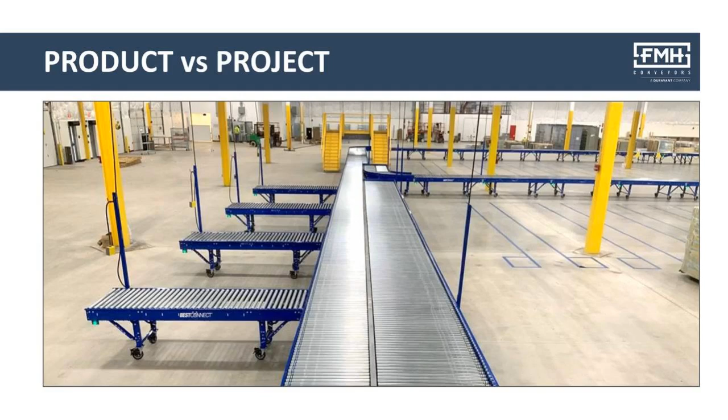So to be able to do that, I want to first talk about what the product portion of this is. The picture you see in front of you is a whole system utilizing various types of the BestConnect product that we have within the portfolio.

Looking at it, the benefits of the product are very, very key, because as you're looking to sell, to create value for your end user, it's important to talk about certain aspects of the product that work for them. Everything is on casters within this system.

It doesn't necessarily ship completely assembled. The bed sections ship on a pallet. The leg assemblies have to be assembled to that particular bed section, and obviously whatever height you need, you can have, but it's modular. Every section is essentially its own entity.

You can plug it in. Either end has COM cables, plugs, so that as you connect this system in a run, you end up daisy chaining them together to create your system and the componentry needed to keep the power and communication lines going. It's a very quick deployable system in terms of installation.

Most of these sections take 2 men, 30 minutes to build. Overall, once the system is built, it's very simple to deploy, rearrange, and create the space you need for multiple industries.

Hardware, very basic hardware to put these together. There's very simple connecting plates that connect the side frames to each individual section as well as the next one in line. And very basic accessories to create the overall system.

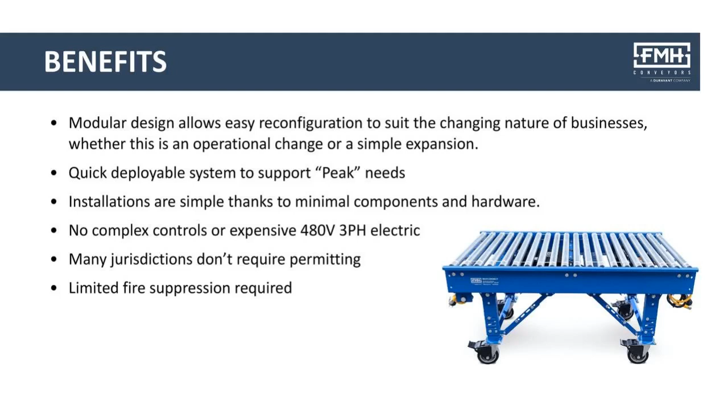Because you're not looking at 480 volt 3-phase electric, and you're not fixing it to the floor, which requires, a lot of times, fire suppression. We're able to get over the fact that you need fire suppression in most of these cases with limited areas. So it's a very flexible system.

Lots of the vertical markets I like to point out, because many of us, especially in these COVID times, are struggling with customer bases. There's certain people out there that are thriving.

E-commerce, no question, companies like Wayfair, Amazon, Chewy, all these companies that we as humans are ordering from to supply our typical day's needs, are using these systems. They're having to get new conveyor systems to augment their processes because of the uptick in their business.

And subsequently, parcel is a big industry. UPS, FedEx, their business is thriving, which then again relates to third-party logistics. So those are the 3 that I would say are major focuses, if you had to pick.

There's always other opportunities, it becomes more about how you can think of the application. But overall, those three vertical markets I really think are where we're going to thrive at this time.

Still on the product side, as I break down what is in the product, I'll go left to right of these pictures. That is a typical straight section you see in front of you. Each of them have illuminated off-on buttons, and these buttons are not something you depress.

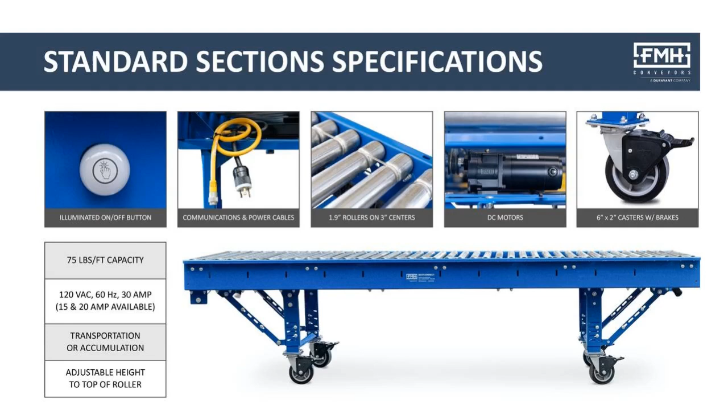All casters are 6x2 locking with brake. As you can see on the left-hand side of the page, there's a few more little tidbits: 75 pounds per foot capacity, adjustable height. We can do transportation or accumulation. But overall, this is the basic guts of each one of the sections.

Section types, we've really added to this in the last probably 18 months. Straight sections we can have in various lengths. Curves are utilizing a conical roller to keep orientation of the package.

We have lift gates, which are an up and downstream section that have wireless communication so that when you pull that lift gate up, it shuts down that system so it's not running. We've got skews and centralizers, which are utilized based upon how you have product orientation going in and out of curves, or having people adjusting using those boxes or actually using the conveyor.

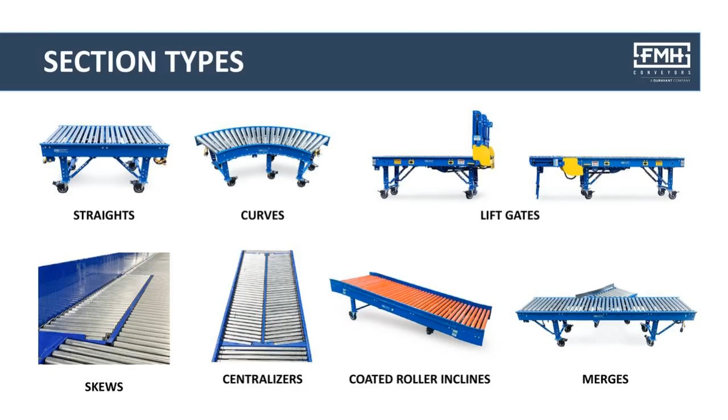Coated roller inclines, again, the coated roller just adds a little bit more friction for pulling that up. And then we have merges, which are a really neat thing that we've developed to be able to index 2 lanes into one. So again, these are all products going into a system.

The straight sections are the backbone to the system. You're going to have different lengths available: 36, 60, 90, 120. Really important for me to indicate that you can cut down on site. So if you're restrained and you need 84 inches, so long as you are cutting down on an axle center that works with it, it's very easy to do.

Standard widths, very basic, nominally at 24, 30, 36, and 48. And then if you employ accumulation into these units, you're going to have a zone approximately every 33 inches.

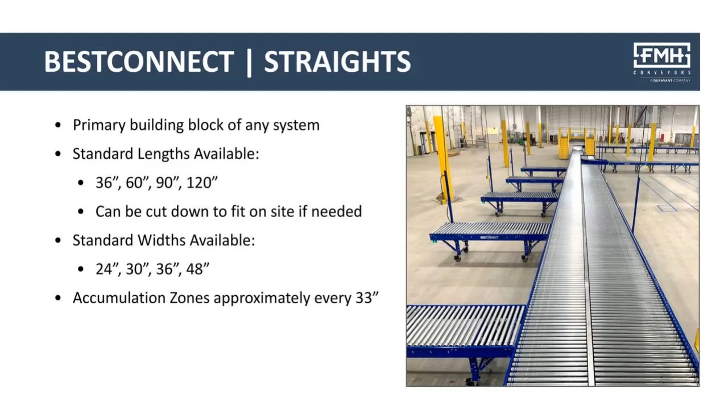Curves, again, very basic, conical rollers. You're going to use this to change direction. They're universal, either left hand or right hand. It's just about reversing the direction of the rollers.

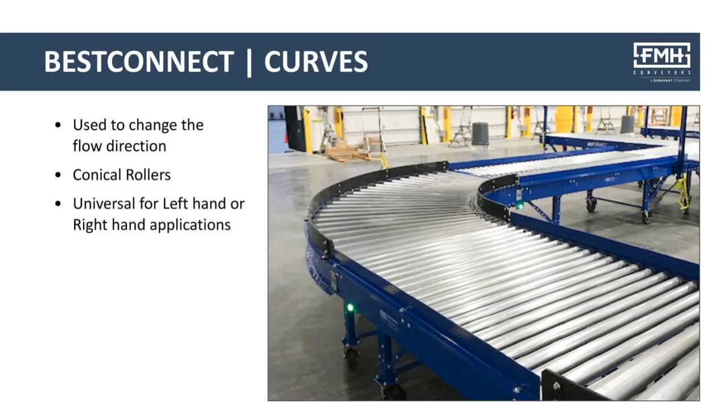And as you can see there, this shows some of those lighted buttons that I mentioned earlier, so that you can, again, visually, even through pictures, see the illumination showing that those sections are on.

Centralizers, this is something developed because when people are sorting packages, and this is true for any conveyor type, they're tossing boxes on, packages on, and they're haphazardly moving down that system. As it needs to sort to the human, to then subsort, say a pallet, a box, or a different area that the human has to handle, it's usually on one side or the other, so it's not necessarily ergonomically easy to gain access to.

So when you put these centralizers in, or a herringbone powered conveyor before or after a curve, it's going to center that coming out of that curve to where it's more ergonomically sound to grab them. And so hence why we developed that.

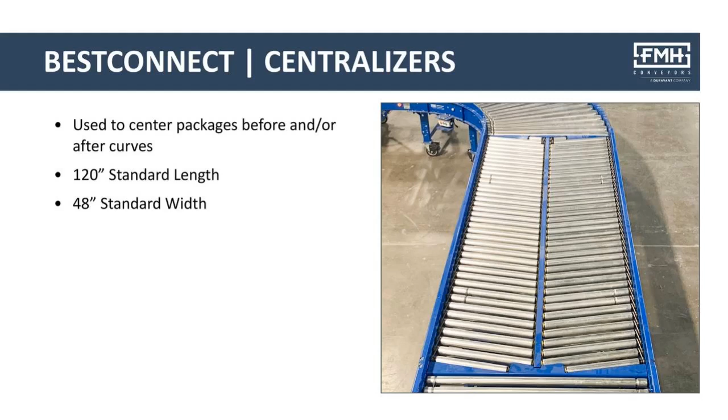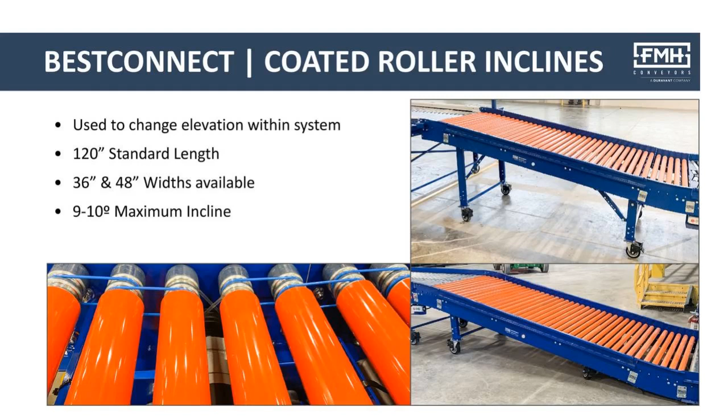Coated roller inclines, again, its purpose is just to add friction when you have an elevation change within the system, so that you don't have any slippage with the package. Just like a roller coaster, when it's inclining, it has that chain that grabs those cars so it pulls it up with it. Kind of the same sense within this.

Lift gates, we've had them around for a couple of years now. We only make those in 36 and 48 because of how heavy they are. They come in basically a 120 inch section. You have a downstream section 120 inches, an upstream section 120 inches. When you open those biparting gates up, you have a 5 foot gap, which gives enough space for most every pallet jack, and gives a good egress point within a long run.

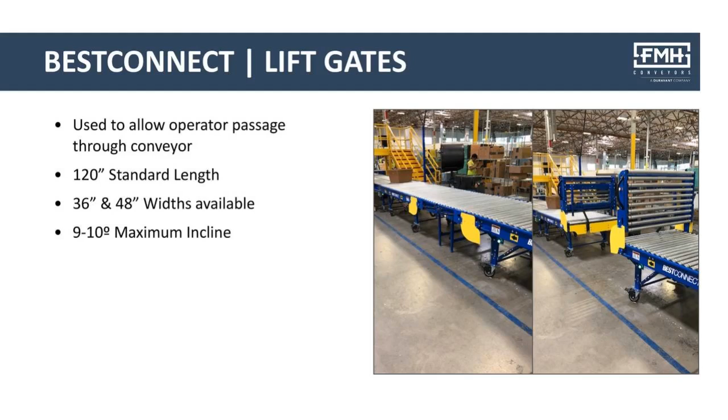Skews, again, same concept as the centralizer, but the skew is going to push it to one side or the other. So if you have humans on one side of the conveyor looking to subsort those packages, we put a skew section in, and that'll pull it towards those people that are sorting so that they don't have to reach as far to grab.

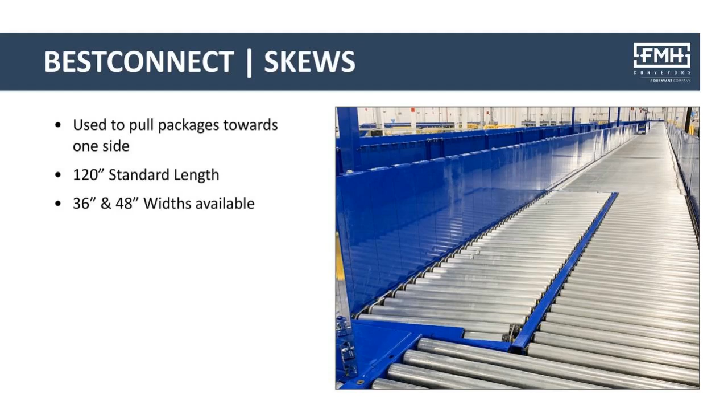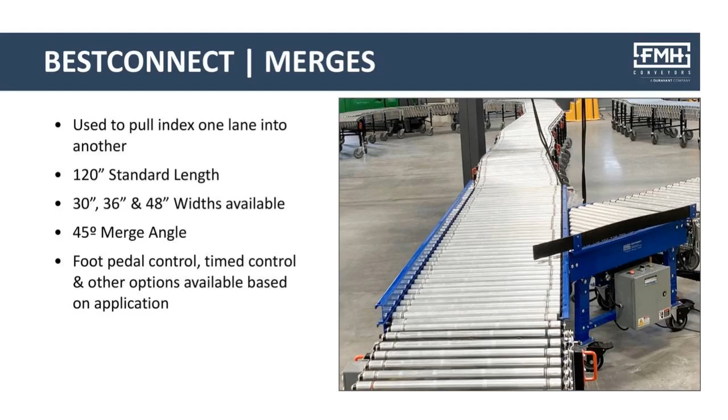Accessories, very, very basic, and we can create new ones based upon what your system looks like. We have cord protection—again, every so often you drop based upon how many motors are drawing off that system. We also have side rail, in varying heights and varying lengths, all dependent on how and where you want them in your system. Sometimes when you have back-to-back sections, you need some sort of bridge to make sure there's a nice package transfer point, so we have a stainless steel transfer plate.

But outside of that, if you can think about it, it's very minimal accessories for the system because it's on a modular platform. We don't have to run down E-stops, we're not putting in pull cords, we're not doing anything very difficult in this to create the need for more accessories. This is all pretty well contained.

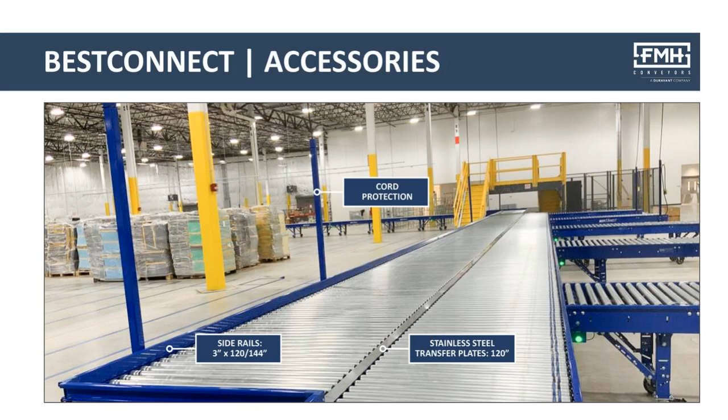So I'm going to stop there for some questions. And I see from Jason here, again, about E-stops and pull cords. So yes, this does have a reality that certain jurisdictions may misconstrue this. This is a UL built product, so all the parts are UL compliant.

The E-stops—because this is a low friction roller, it's the same concept as our BestFlex in terms of the pulleys and the motors. It's a low friction roller, so we're not needing to use the E-stops or pull cords within this system. I've deployed roughly 80 of these around the US in varying degrees of size and complexity and have yet to put any on.

Yes, they do use brushless DC motors. It's the same motor, a Parvalux motor, and again we can get the manual out. One of the things I had meant to do, that I want to do to supplement this, is we may want to include the manual as a downloadable thing because it talks about more of the intangibles here. But the same motor we put on our PowerFlex is on the BestConnect, so it's using the same brushless DC motors.

Jonathan, you're asking about CUL for Canada. Great question. So CUL for Canada changed the game.

It tells me I immediately have to have an E-stop because that's what you need to do. Even on our Flex, by the way, you do need an E-stop. I've put this in Canada. We just finished the system in Ontario, and we did have to have E-stops because of the nature of the requirements, so we can augment the product. That's something I can show at a later date as a follow-up. I can get you some pictures of what that looks like, but yes, we can.

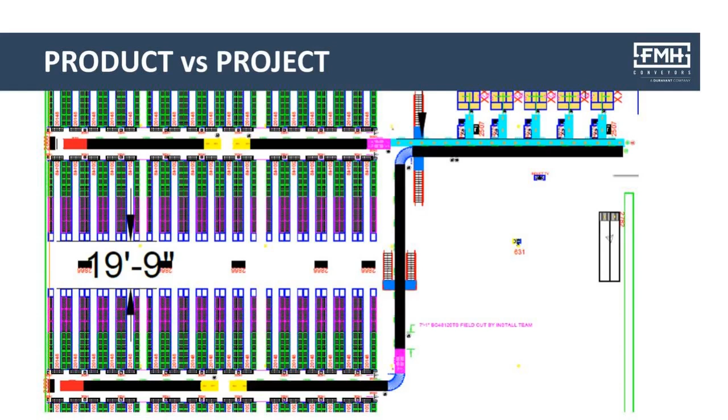And then once we get to that, this is what that system looks like. You've got a very, very simplistic design to sort to either pallets. I see this a lot in e-commerce and inbound, and in customer return fulfillment centers when they're returning and then palletizing based on a SKU product code or some means, after it's sorted. On the left-hand side of that picture, those induct spurs, as I call them, sort packages, and those then get sub-sorted onto pallets or into shelving or carts. Really good way to do this on an effective, inexpensive system.

Really complicated stuff—we can even get this stuff up in the air. We can do elevated systems with this to have more line of sight, bigger sites.

So again, we can get as complex as you'd like, but ultimately speaking—and I like this picture because it shows on those spurs, you see those comm cables, kind of hard to see there, but on each of the ends of the spurs you see the mast pole. You've got a power drop there so they have something to plug in, say a Flex. But they don't need that comm cable right there, so it's just zip-tied out of the way. But who's to say they couldn't add another 10-foot section and create a longer spur? Very, very easy to do.

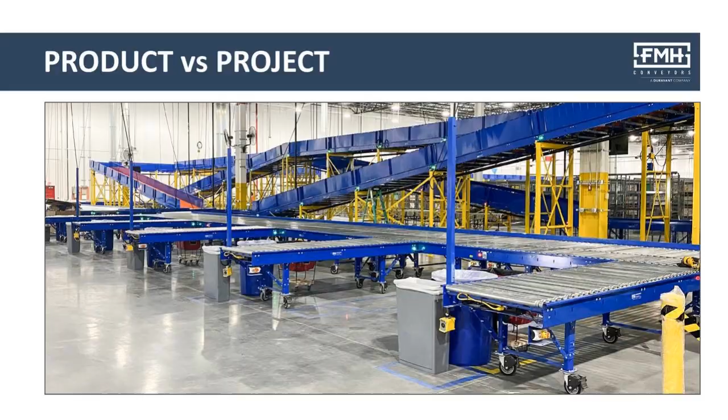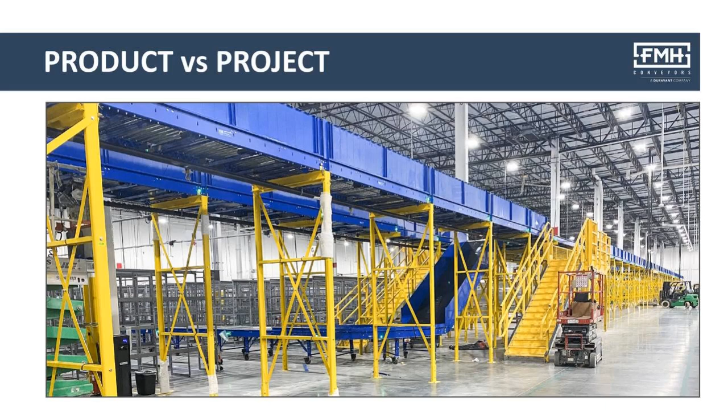Again, just another picture of that same install. I put this in because we have chutes. Some of the things we do to customize and make it more unique is that if we're going from one elevation to another—say we make an incline roller conveyor—we've got to make a chute, which we do. Those chutes, although I didn't discuss them, it's more about project specific that we'll design based upon what that application is.

Another really good photo, because again, sometimes in return centers people use a recirculating conveyor that just keeps going in loops to get packages back into the mix if they're not pulled off.

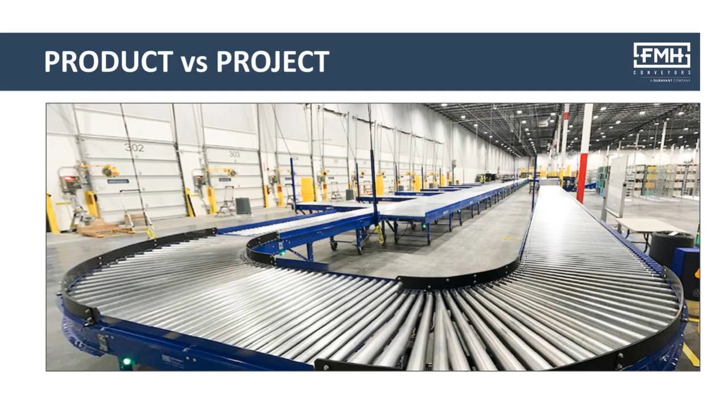Again, very simple system, and it's very clean. If you look tight to these pictures, what do you see on the floor? You don't see much at all. These cables tend to get zip tied, pulled up in the system, and section to section, you're really only looking at a yellow comm cable and a power cable. So it's a very clean system. You turn those casters in, you lock them, you plug them in, and really from an aesthetic point of view, very simplistic.

Even more complex systems where you're going to have change of elevation, with multiple products employed into a system to do bigger sorts. These systems, a lot of them, we can power the conveyor from 0 to 200 feet per minute. And I can appreciate that within a given system, you may have multiple needs for feet per minute based upon what's going on at that system. So each section gives you the capability of setting that speed to whatever means you want.

And most of the time, in fact, all the time, we do use a tachometer. We set those speeds, and then that way we can characterize that system to meet what they're trying to achieve. So say they have a high need to inbound lots of packages, they can do that, and then maybe they slow down the system feet per minute as they're sorting them, because humans can't react that quick at 200 feet per minute or 160. Maybe that's slowing down to 40 to 50 to 60.

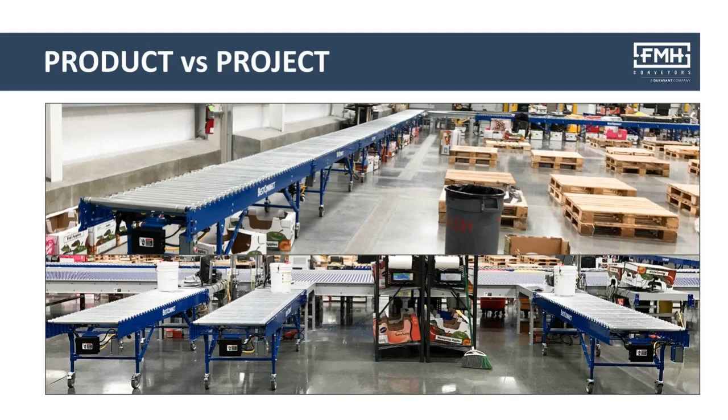And I did some research on this one with my counterpart who sold it. And it was because the BestConnect gave them a lot less complexity on both installation, planning, permitting, you name it, and it gives them the modularity to change if their facility does. This building is ginormous. It's far larger than you see here, so it gives them the chance to expand into this by literally just buying more sections, attaching to the end, and maybe another power drop, which a power drop's anywhere from $4,000 to $5,000 versus more expensive options.

Here and again, this is a good example of a very basic system. It's a dumb system. There's not expensive controls like I had mentioned. So what you have here is you have basically a grid of very basic packaging benches, probably a Denko bench or something like that, palletized locations, and the conveyor running, and people working in each one of these cells to either label and then print and then apply, put on the conveyor, or take off and put it in palletize. But again, the benefit we give here as a team is you're the ones that are supplying the benches, the matting, all transfer tables, and some of the actual installation and maybe the engineering to a degree, but you can see how modular that product is.

And once again, I can appreciate that to some degree controls, logic, and other tweaks may be needed. So I don't want to keep you away from suggesting or talking to us about that, yet it truly is a pretty basic system where there's not going to be a photo eye that stops a package for a while, then turns it back on. Could we do it? Sure. But I'd like to learn more about that application before we did it. But again, another nice opportunity to see a project.

I'll stop there again for questions.

I think the advantage against the Hytrol is that Hytrol brought that in, and I don't know enough about that product to speak overly intelligently about it. I can just tell you that this is our mousetrap as opposed to the Hytrol 24 volt. We could look at it. I'd have to dig into more of that product, but I would venture that the simplicity of what I've presented in the last 30 minutes is going to be the advantage.

I think the mobility is, I'm guessing Hytrol can make their equipment mobile too, but until I know how they're connecting section to section, how they're employing this product to manage power drops and other installation realities, it's hard for me to answer. But I would be betting that this would be a competing product to a degree with that.

So overall, this is the end of the presentation. I think the goal here is to start having everyone listening in think about this as a project. We're doing things to develop the product to showcase on the website, marketing collateral, and then obviously with our regional salespeople, our intention with this is to look at the market as it is. People are looking for very simple solutions, inexpensive solutions, relatively speaking. Everything's expensive, but something that creates value.